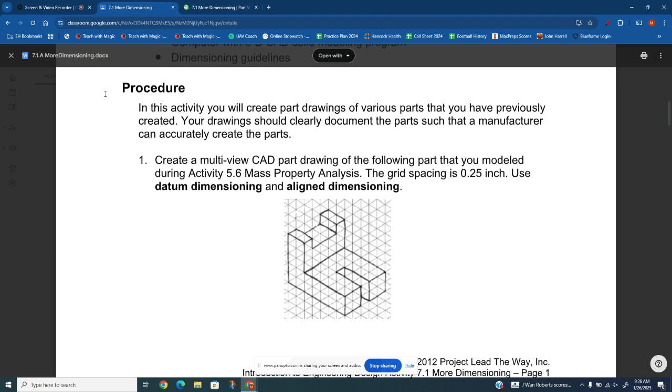Okay, hi guys, Mr. Galyan here, and I am going to show you guys today how to do assignment 7.1, more dimensioning on OnShape. So there are 5 parts to create on this assignment. What I'm doing in this video is just showing you how to make each part. I'm not getting into the drawing parts of it yet. Right now it's just the making of it. So let's jump right in.

We'll look at part 1. So part 1 here is this, I call it a chair. I don't know what you'd call this part, but that's kind of what I reference it as. And on part 1, each grid space is 1/4 of an inch. So what we're going to do to build this, the easiest way is to make kind of this left side of the chair, extrude it all the way through, and then cut out the notch at the top and cut out the notch at the bottom.

So if we look at this, this is 7 squares wide and 5 squares tall. So we'll jump right into OnShape here, and we're going to create a sketch. We're going to draw it like this. Make sure our lines are straight up and down, straight horizontal. We're going to make something like that.

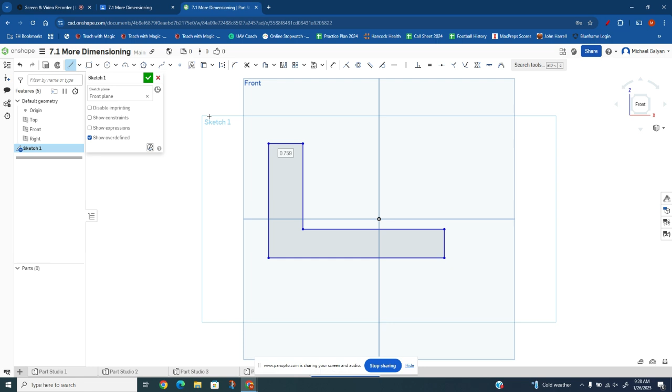Now we can use our dimension tool. We said it's 7 squares. Each square is 1/4 of an inch, so that is 1.75 inches wide. And it was 5 squares tall, so that's 1.25 inches tall. And it is 2 squares wide there, 2 squares tall there. So this should be 0.5. This should be 0.5. And we've got that kind of L shape. So now I can finish that.

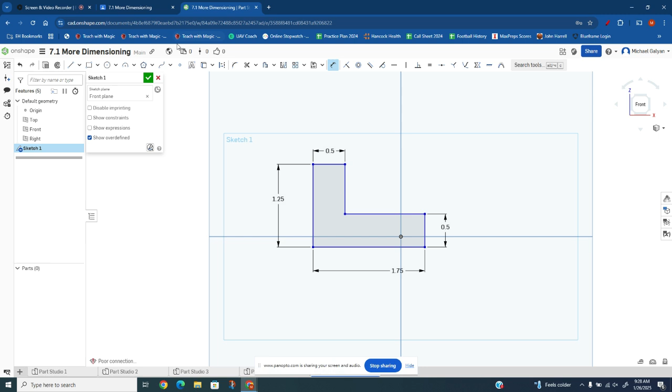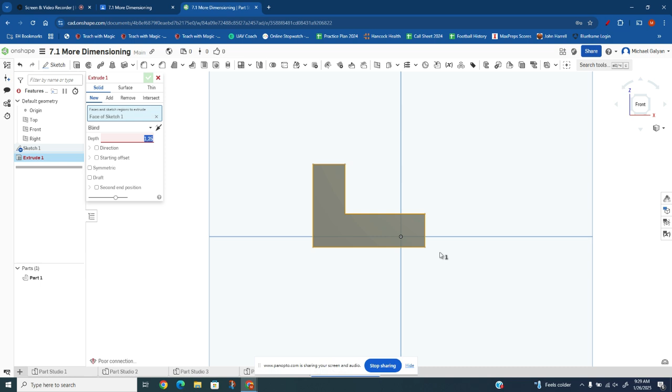Now we need to see how far to extrude it. Well, the width of this object is 5 squares. That's 1.25 inches wide. So now we can extrude this 1.25 inches. I typed something wrong. Yeah, I did. Okay, now we're good. I typed a comma instead of a period. So now we've got this seat part of the chair.

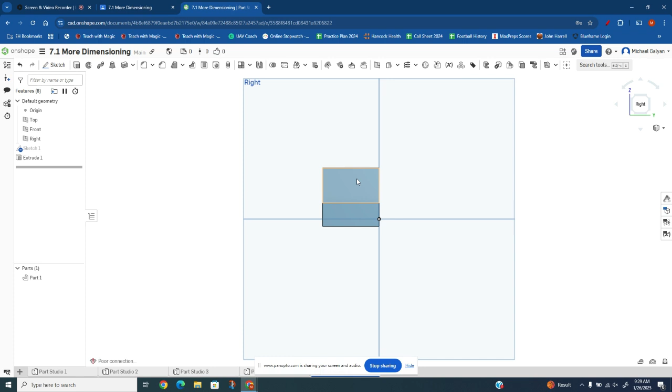Now we need to cut this notch out at the top. So if you see, this notch is 3 squares wide, 1 square deep, and goes all the way through there. So we're going to put a drawing right here. We'll zoom in on it. Put a drawing here. And again, we're going to dimension that. 3 squares wide would be 0.75 wide. 1 square deep would be 0.25.

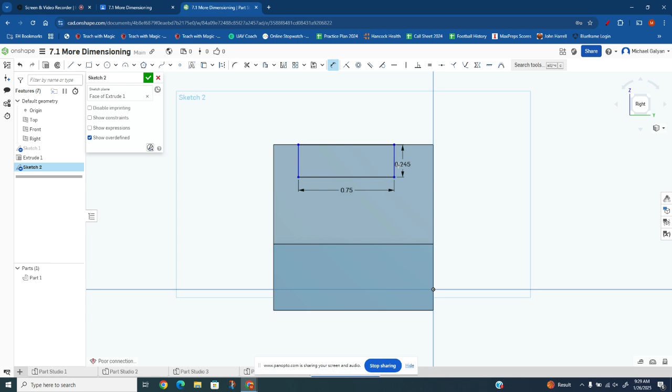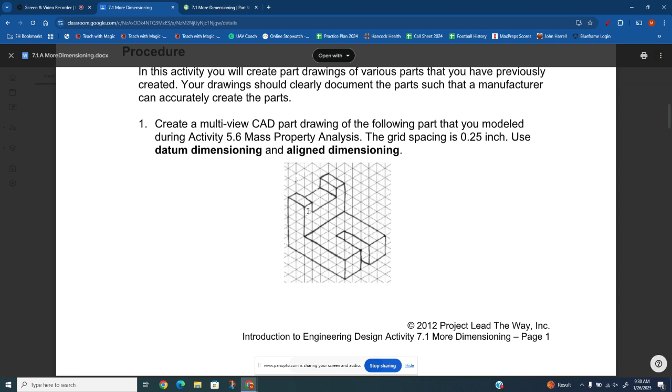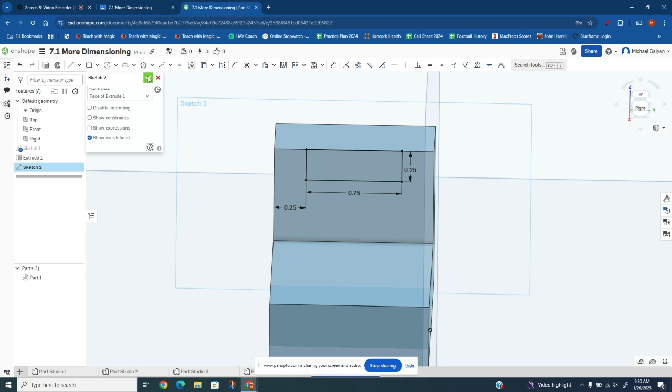Now, one of the key things, if you look at this, if I were to just cut this right now, you'd notice this little notch would be offset. So we also need to dimension the location of the notch. It is 1 square away from each side. So we need to dimension the location from here to here is 0.25 inches. And this one I don't need to dimension, but if I put a dimension there, you would see that it's also 0.25 inches. Now that thing is centered up. So I can hit my check mark, and I can extrude and change this to remove, and it will now cut out that top notch.

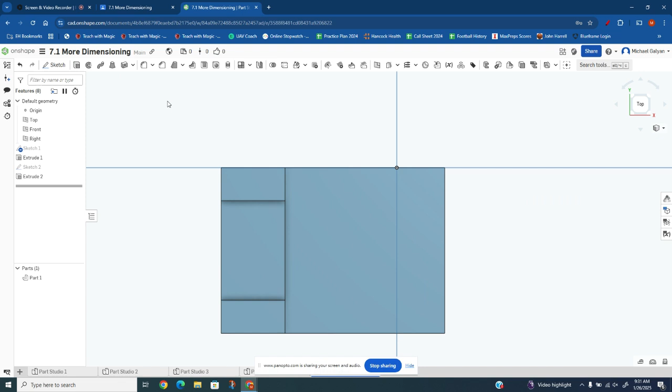All right, now I need the notch that would go down here. So now I look down here, and we see that that notch is also centered right smack in the middle of this thing. It is 1 wide, and it is 3 deep going back to the left. So I can do the same thing I did with the top, and I can sketch a rectangle here. Let me redo that. I think I messed something up. Let me redo, and I can sketch a rectangle here. And it was 1 wide, so 0.25 wide, and we said that was 3 deep, so 0.75 deep.

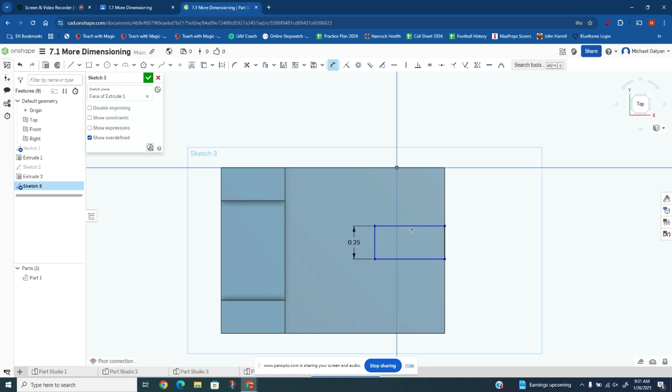And again, we want to center that within there.

Sorry, my cat is trying to play with me right now.

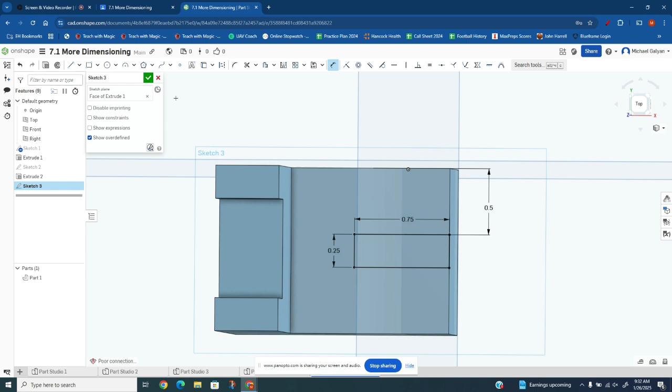So, we need to center that. So, we're going to go from this line to this line, and that should be 0.5. Now that piece is centered, and we can now extrude that and remove it just like we did the top one, and we are all done. So part 1 complete. All right, let's move on to part 2.

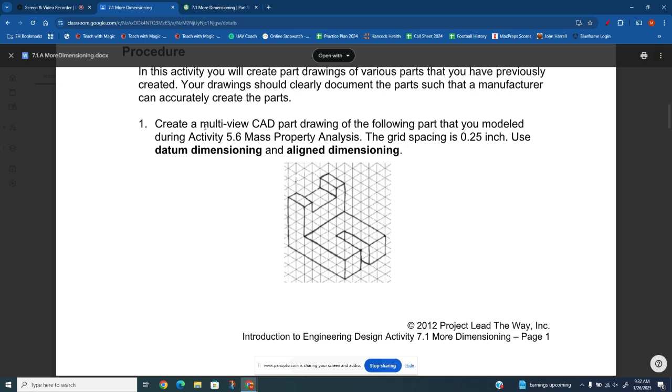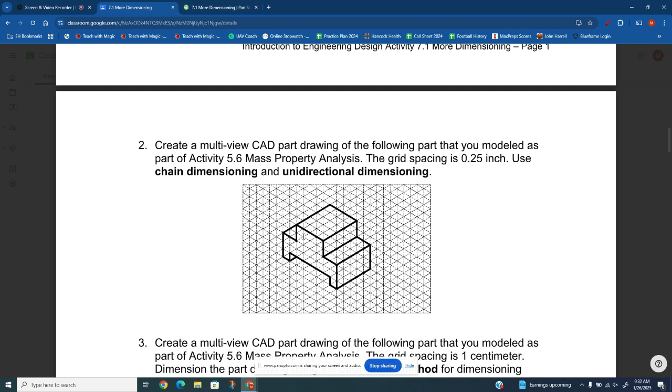Part 2 looks like this kind of, I don't even know what you'd call it, like a tabletop type thing. This one's fairly easy. We're just going to make this front view right here and just extrude it straight back. There's no other special stuff we need. So let's jump to Part Studio 2 to create this. We'll create it on the front.

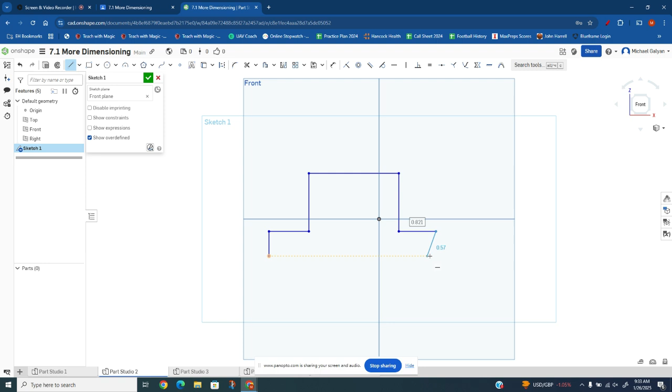And basically all we're going to do is draw this and then go through and dimension it and extrude it straight back. So we're going to draw it, and you'll see it just kind of goes up, over, down, kind of that way. So let's go ahead and try drawing this thing. So if I start here, it goes up, over, down, over, down. See, I squared up with that one. It makes life a little bit easier in the long run.

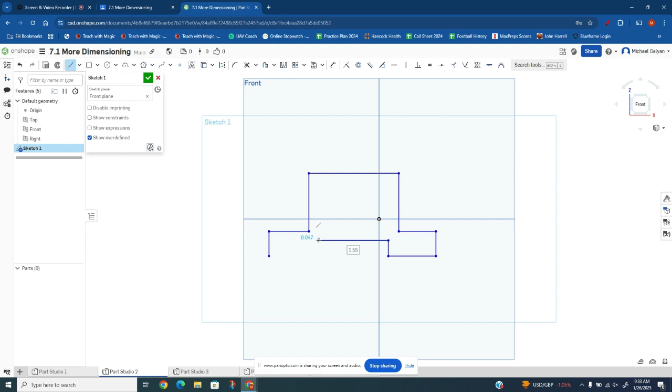And then I'm going to check and see what I need to do next. Down, I need to go over, up, over, down, over. So I can go over, up, over, down, over. Now it's just going to take some dimensioning here. So it looks nothing like what it's supposed to, but once I dimension everything in, it should be fine. So this first line should be 3 tall, so that's 0.75.

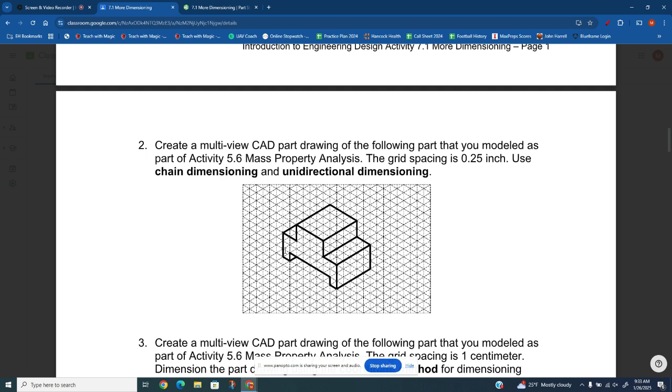So I'm going to, let's see if I can split this. There we go. That makes life a little bit easier here. I can now see that as I go to dimension this. So now I have my dimension tool by hitting the letter D. So I could make that 0.75 tall. And then it goes over 2, so this line right here will be 0.5. And then it goes up 2, so this line right here that I have highlighted will be 0.5.

And then it goes over 4, so this top tabletop part will be 1 inch. And then it's going to go back down 0.5, which it's already there. And then here, this next little part goes over 2. That's this part right here. It's not highlighting, but this part right here. So 2 is 0.5 inches.

And now you can see what's happened over here. So let's look at this. What's happened is, if you could tell, this has kind of gotten tangled up, which is a common thing. And if something gets tangled, what I like to do is kind of Control Z. And I'm going to come back over here. I'm going to delete that dimension. I'm going to come back over here and fix it from this side. So we're going to go here. I'm going to hit dimension, and I'm going to fix this line.

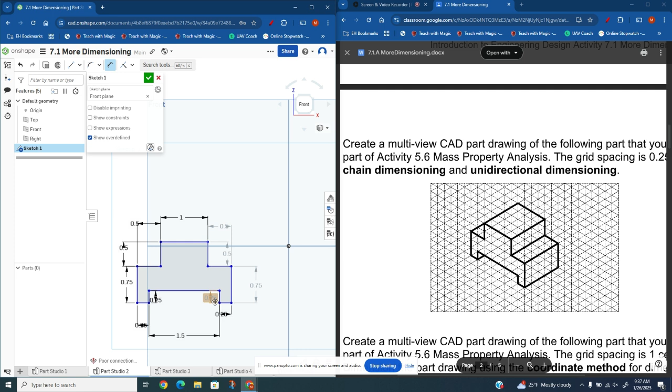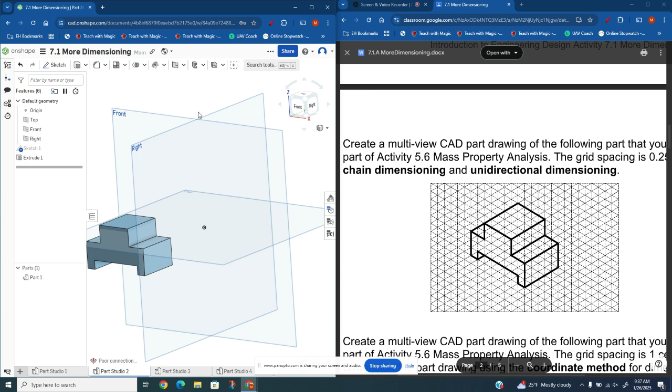And now we've got this shape that we can go ahead and extrude through. So now we've got our shape made. We just need to extrude it, and it goes 1, 2, 3, 4, 5 deep, which tells me that that is 1.25 inches deep. So I can extrude that out to there, and then I am done with that one.

All right. Now, this one here, number 3, is where people start to get really confused. But 3 is actually not that difficult. It's just using a tool called Loft that a lot of you guys haven't used before. So once I show you guys how to do Loft, you're going to go, oh, this is actually a pretty easy one. Even though this cut, if you notice, angles back, it's deeper in the front than it is in the back. So we're going to start by just making this rectangular box.

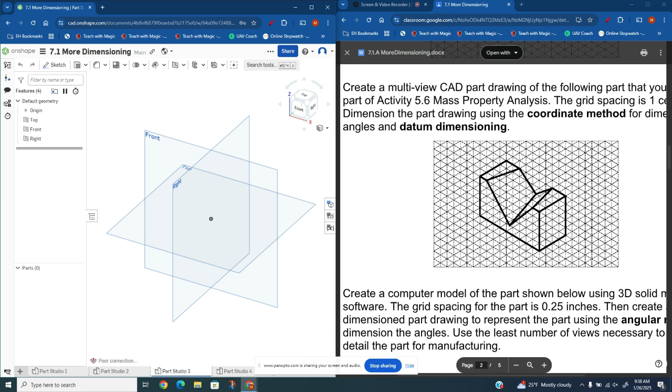So we're going to make a box, and we notice here the grid spacing is 1 centimeter. So we're going to make a box that is 1, 2, 3, 4, 5, 6, 7, 8, 9 centimeters wide, 1, 2, 3, 4, 5 tall, and 1, 2, 3, 4 deep. So let's just start with that. So 9 centimeters wide.

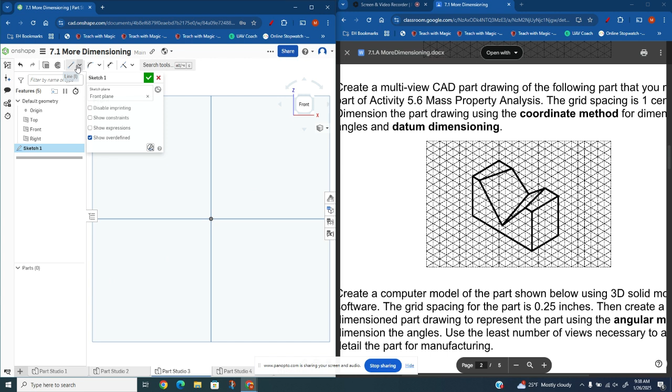Let's get back to here so we have all of our tools visible.

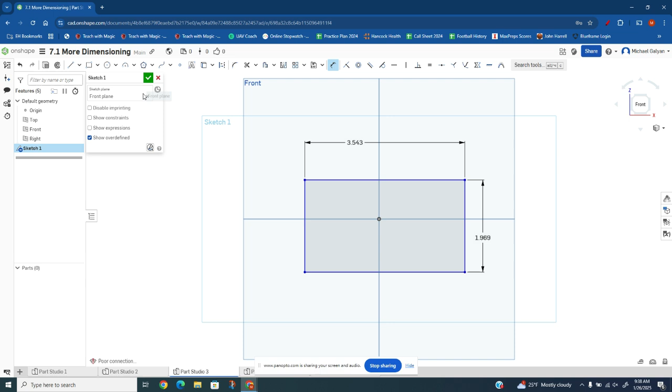9 centimeters wide. If I hit my dimension tool, I can type 9 centimeters, 5 centimeters tall. And then I'm going to extrude it 4 centimeters deep.

Boom, box is done. Now what I'm going to do is make sure this has all been working. Yeah, it's all been, making sure it was all recording okay. That's all I was just curious about.

We're going to draw a triangle. If you notice, this cut is triangular in shape. So what I'm going to do is draw a triangle on the front. If you think of the 3 points of the triangle, 1 point is here where my mouse is, 1 point down here, and 1 point up here. If we put a dot where each of those points are and connect the dots, we can make this triangle.

Excuse me while I sneeze here. Sorry, cold season here in January.

But if I put a dot where each of those are, you can really make this work. So these top 2 points, if you think about them, they are on that top edge of the box, and each of them is 1 centimeter from their respective corner. So if I look at this bottom one, this third point, it is 1 centimeter off the bottom, and you can tell it's also centered left to right. So it is 4.5 centimeters from the left, 4.5 centimeters from the right. Here's kind of how I look at this.

What I like to do is draw a triangle, and you can do it 2 ways. I know a lot of people will just put those 3 points in and then connect them. So they'll put a point here, make sure it's on that line, then put a point here, and then a point down here. I'm just going to put this point.

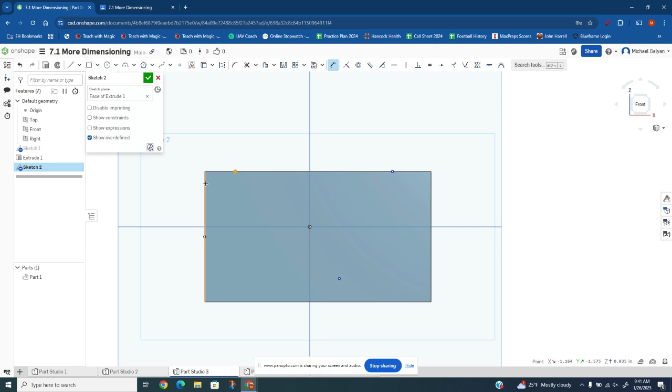I know this is off center, I know these points' locations are not correct, but I'm going to show you how you can make sure they're good. So this one, as long as you attached it to this top line, all you need to do is dimension from here to here 1 centimeter, and it puts that point in the exact right location. Same thing over here, 1 centimeter, puts that in the correct location.

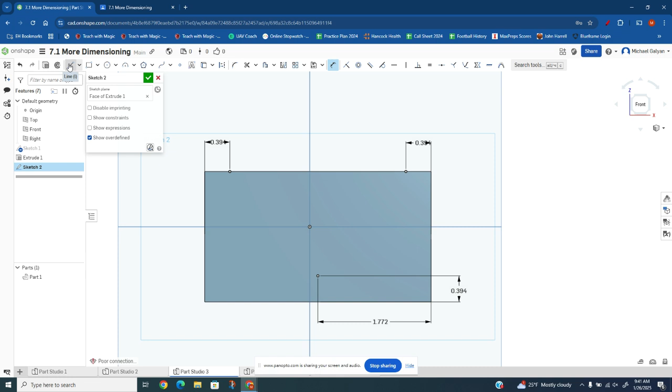Now this one, we need to know how far it is off the bottom and how far it is from the side. So we're going to dimension off the bottom 1 centimeter, and we're going to dimension from the side 4.5 centimeters. Now I've got those 3 points. All I have to do is switch to my line tool and connect the lines.

And I am done with sketch 2. So I've got a triangle on the front. Now what I'm going to do is flip around to the back and draw another triangle on the back that's a different size that'll allow us to cut to it.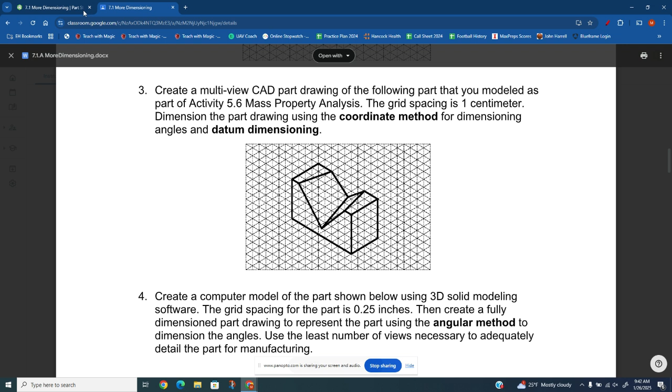So what we're going to do here on the back, and again we are looking at the back of this box, is we're going to put our points again. We're going to put a sketch on the back of the box. We're going to put a point here, a point here, and again just make sure that you highlight that top line and it sticks to those lines. And then we're going to put one right in there somewhere.

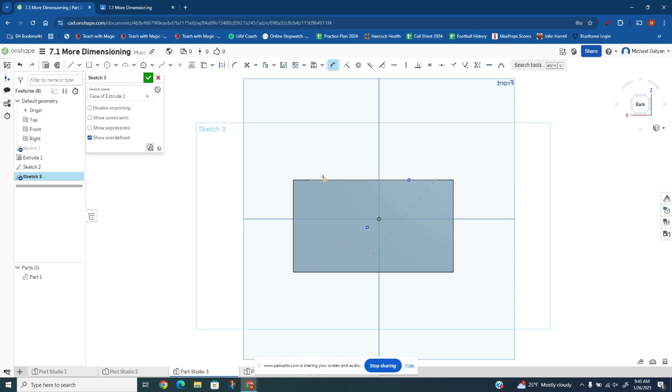Now we can hit our dimension tool again. This should be 2 centimeters from the edge, this should be 2 centimeters from that edge, this should be 2 centimeters from the top, and 4.5 centimeters from the edge. About 4.5 centimeters would probably make more sense than inches. There we go. Now we can connect the dots again.

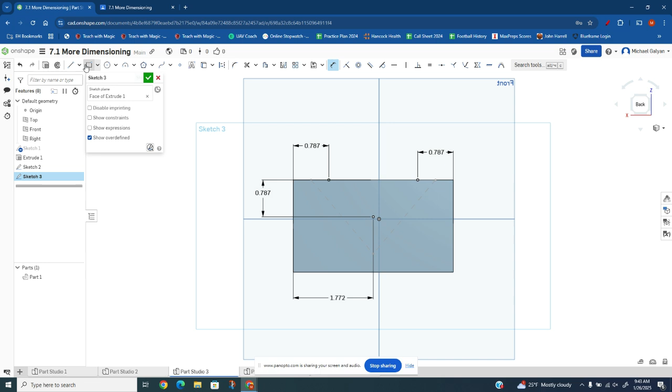And now you'll notice we have 2 triangles drawn, one on the front, one on the back. This is our last part, and then we'll be done with part 3. We can't use extrude for this. Extrude won't work. We're going to use loft.

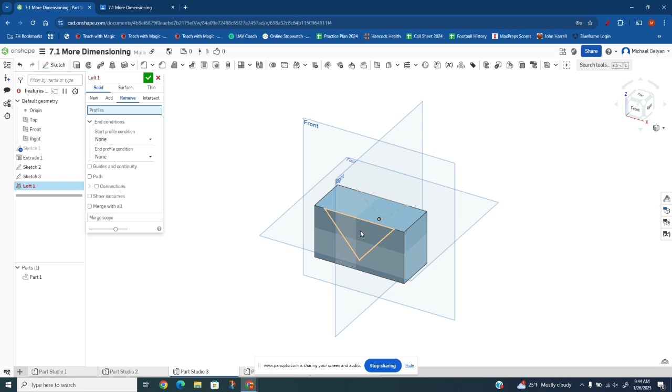There's a tool over here called loft, and loft will connect 2 parts on different planes, or cut 2 parts on different planes. So we're going to remove, and I'm going to click on this triangle on the front first, then flip around to the back, click on that triangle on the back, check mark, and you'll notice it cuts it at that cool angle.

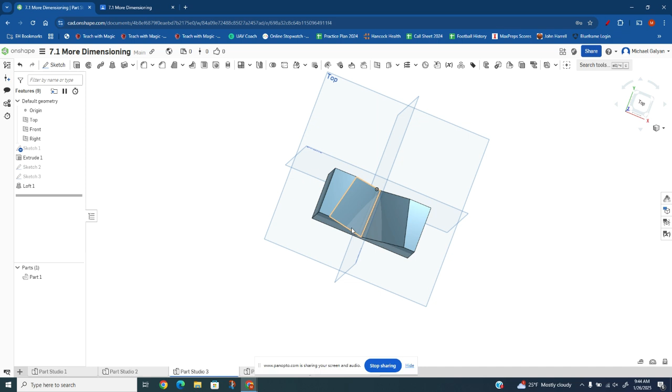All right, so now we are all done with part 3. With part 3, if you notice that something doesn't look symmetrical, if something's off, it's probably because you dimensioned something wrong with one of your triangles. You can go back into sketch 2 or sketch 3 and fix it, and the loft will adjust with it. So if you notice this is way smaller than this, or it's not going up as it goes back, you can go back and make those adjustments.

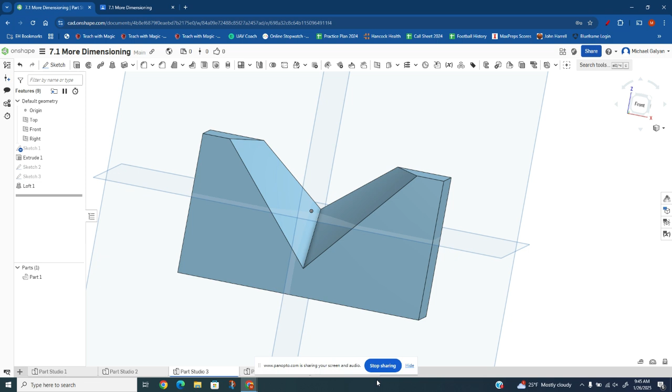So now if we go to part 4, right? Part 4 is this one here. The way I've done part 4 in the past is I typically make this as one big rectangle here, and then I cut this edge off, almost like a chamfer. Then I extrude out this part, it's not quite a triangle because it's got 4 sides, but I extrude this out afterwards. So let's start with this.

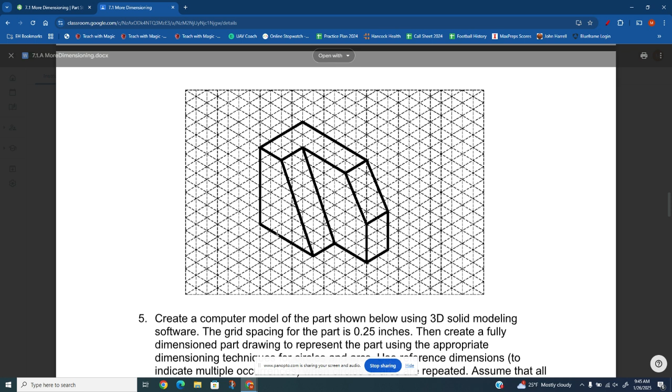This whole thing, if I were to make it, is 1, 2, 3, 4, 5, 6, 7, 8 wide, and this is in 0.25 inches again. This part right here is 2 deep and 1, 2, 3, 4, 5, 6 tall. So let's make something here. 8 wide would be 2 inches, 6 tall would be 1.5 inches, and we want to extrude it half an inch because it was 2 squares.

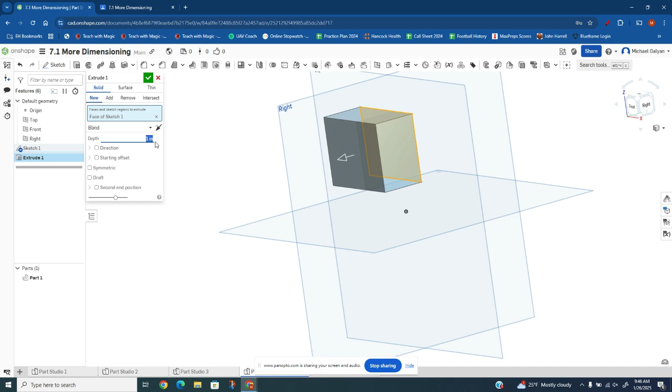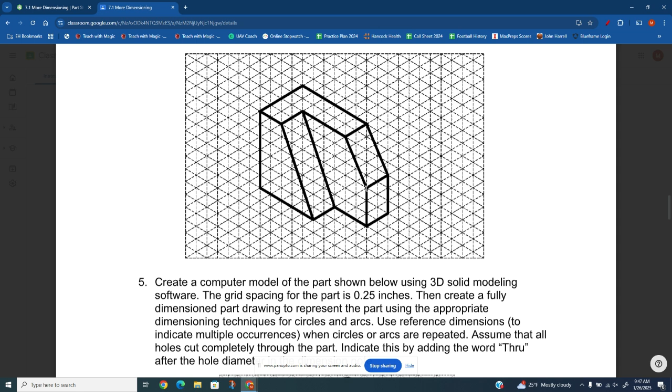So imagine this as being in 2 parts. This is the back part, kind of what my mouse is on right here, and this is that part. Now we need to cut off this little corner. How do we cut off that corner? The best way is to measure up. If we think of this angular line, we can come up 3, 1, 2, 3, and put a point right there, right where that spot is. So if we come back over here and make a sketch, we can put a point using our point tool right there, and another point up there.

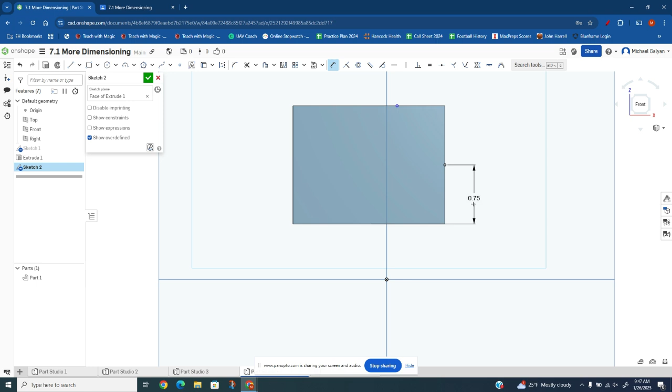Now we're going to figure out exactly how to dimension them. The bottom one we said was 3, so that is 0.75 inches off the bottom. The top one, if we look, is 1, 2, 3, 4, 5, 6 blocks from the far left, so that is 6 blocks, which is 1.5 inches. Now all we have to do is connect the dots.

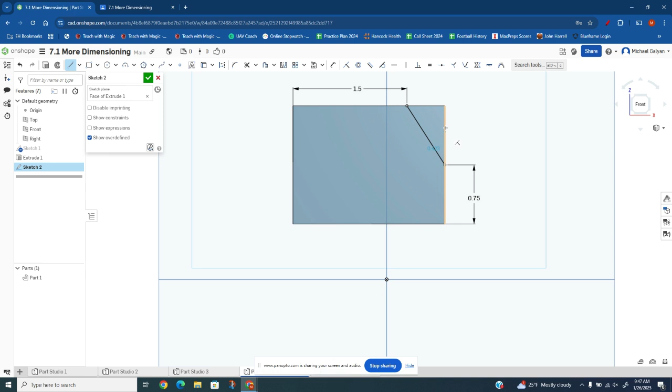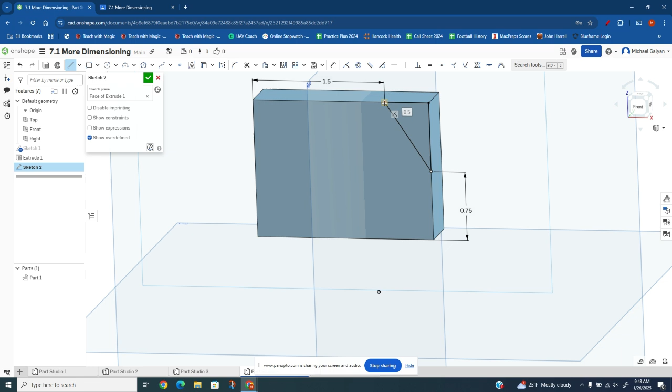Now, in order to extrude this, we will need to also go up to the corner and over. So in order to extrude and cut out this edge, we have to make that a full triangle. That's something a lot of students forget to do, they'll just make that line and then get confused as to why it won't extrude. You've got to go back up and make that full edge, because you've got to have a full shape in order to extrude something to remove it. So now we can click on remove, and we've gotten rid of that part.

So now, as you can see, we've got this part right here. We just need to draw this other part onto it. What I do here, again, I use my point tool. I put a point right here, a point right here, a point right here, and a point right here, connect them all, and then I can extrude that out towards me.

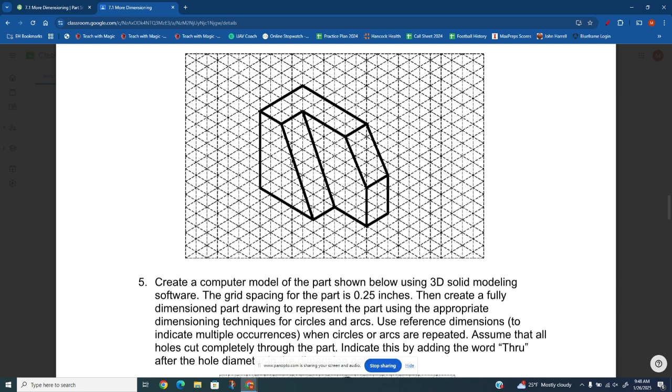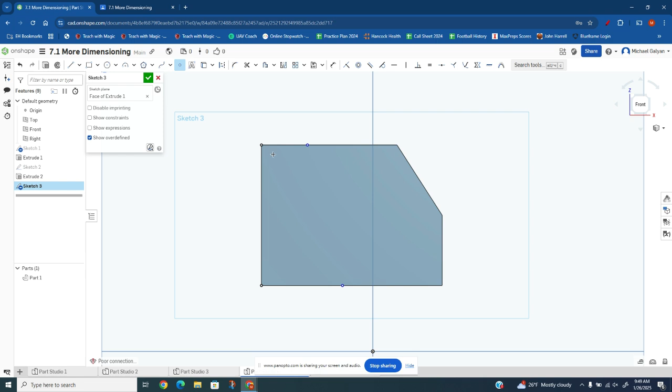So if we do that, we can make a new sketch, and I can put points here, here, and then in each corner. Now I just need to dimension them to the right spot. This top point is 2 off the left, so that's 0.5 inches. This bottom point is 1, 2, 3, 4, 5 off the left, so that is 1.25 inches. And then use our line tool to connect them all.

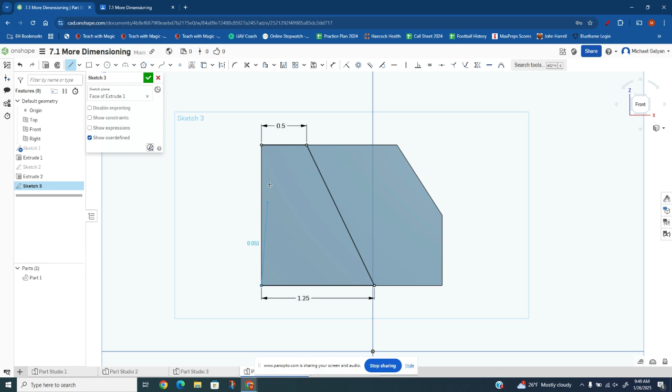And now we can finish that, and we can extrude that out towards us. It was two deep, so we need to extrude at 0.5. And now we have shape number 4. So I'm going to leave off right there.

Shape 5 is a little more confusing. I'm going to make a whole different video on shape 5, or we'll do it in class, one or the other. So I'm not going to add that in right now.

Actually, you know what? Let's go ahead and do shape 5. We might as well, just to add it to this video, just so that we've got it. I wasn't going to, because I was going to do that as a separate day's assignment, but we'll do shape 5 as well. So shape 5.

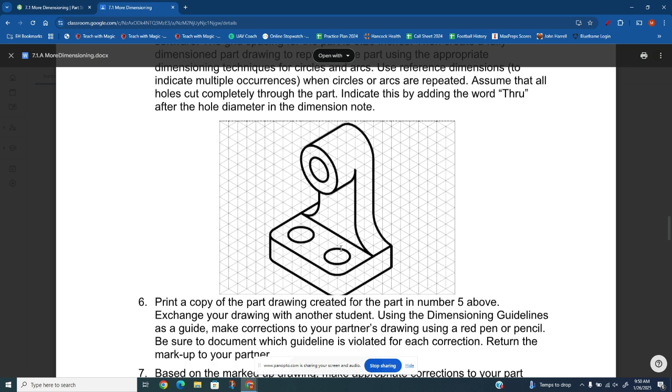This one confuses a lot of people because of all the edges that are rounded. And the biggest part that confuses people is you can't see exactly how tall this is very well because of the way that part of this is hidden.

But with the way shape 5 is, what we do: we make the base as a square, and then we fillet the edges. Then we make this vertical part as a square, and then we fillet the edges. And then we draw the circle and extrude it out towards us here.

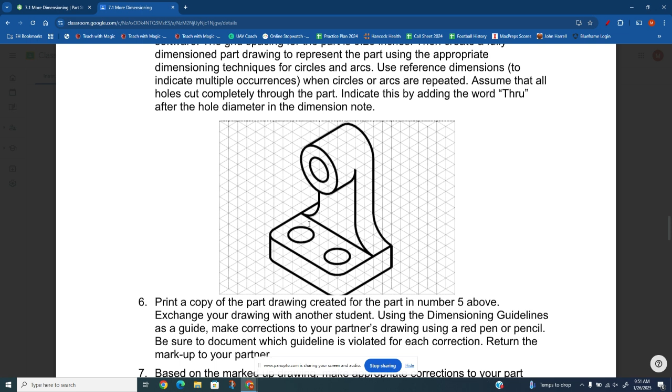So we're going to start with the base. The base, we think of it as a square. It is 1, 2, 3, 4, 5, 6, 7, 8 squares wide. Each square again is 0.25 inches. And it is 1, 2, 3, 4, 5, 6 squares towards us. So 8 by 6 and 2 high.

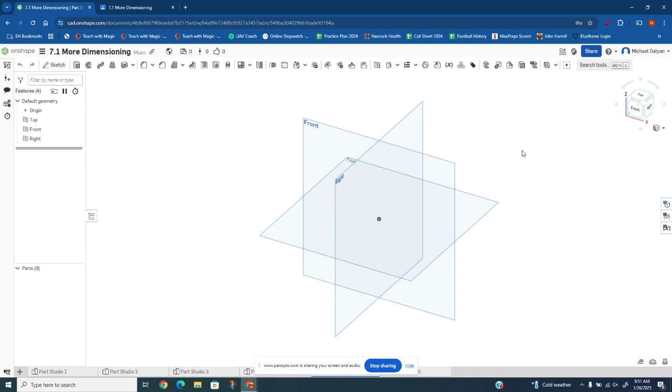So let's make a new part studio down here. We said 8 by 6. So 8 is 2 inches. 6 is 1.5 inches. And we will extrude that 1/2 inch deep.

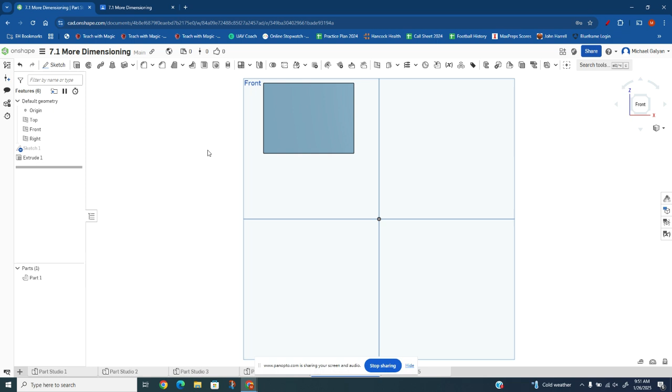So that is our base right there. All right, so we have our base. Now we need to fillet the edges here. The back edges, as you noticed, are square. The front ones are filleted. So let's go ahead and just fillet the front one.

So we'll just click on our fillet tool. Click on that edge, click on that edge. It doesn't tell you exactly what the fillets should be on this. We would assume that they are 0.125 inches because they're kind of half of what each part is. But...

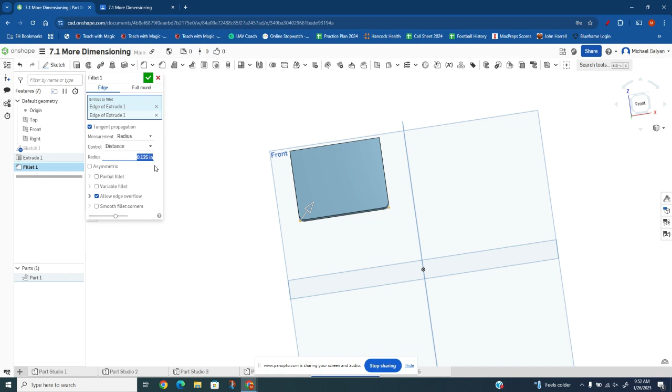If I do that, what you're going to see is they look really, really small when I do that. So I don't care so much if your fillets are perfect, because they don't give you any dimensioning here to know exactly how big to make them. So I'm not too worried. If you left it with what it was, I think it was like 0.376 radius. If you left it there as the default, then you're perfectly fine. I'm not going to care either way on that.

So now let's look at this vertical part that sticks up. First off, we need to figure out how tall it is. It is 1, 2, 3, 4, 5, 6, 7, 8, 9 tall. So 9 is going to be 2.25 inches tall. And the width of it, not counting these edges, the width through the middle of it is 1, 2, 3, 4. So it's 1 inch wide, and it is 2.25 inches tall.

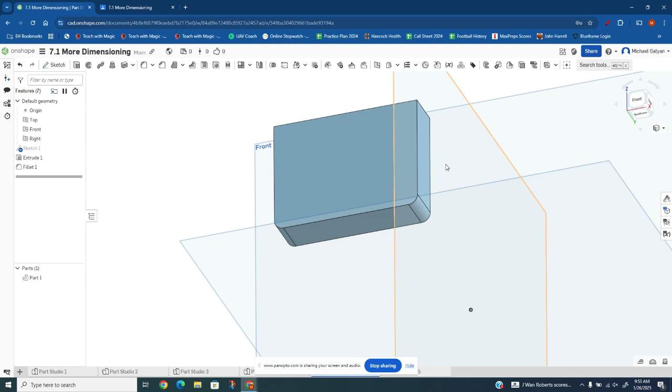So what I'm going to do now, I'm going to draw a rectangle. It doesn't look like a rectangle, but I'm going to draw a rectangle here that is 1 inch wide and 1/2 inch deep, because you can see the depth here is 2 blocks.

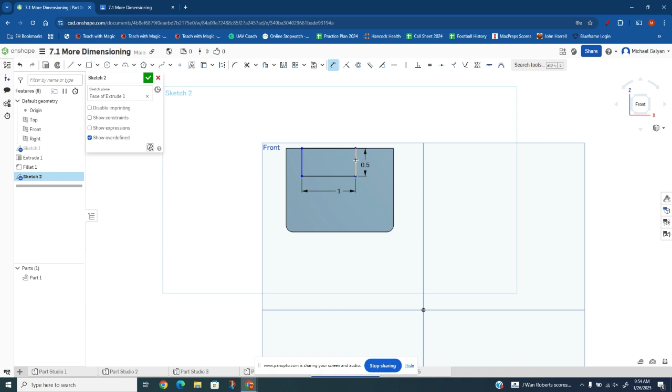And I need to center this. So to center it, we know this whole thing is 2 inches wide. If this is 1 inch wide, then it needs to be 1/2 inch from each side. So now it's centered. I can check mark it and then extrude it.

2.25, just like we said. All right, did it extrude? Make sure it got the right 2.25.

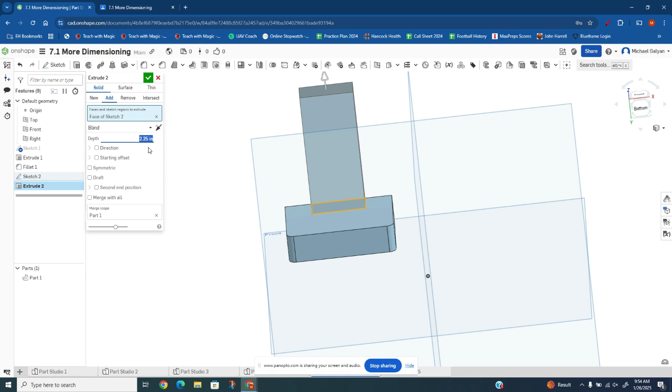There we go. I didn't think that looked right. Now I know this doesn't look like the object in the picture here yet, and that's because we haven't added the rounding parts. So the first part I'm going to do is down here. So down here, you can see how this slopes and connects right here. Ours obviously does not do that. So what we're going to do, we're going to add a fillet.

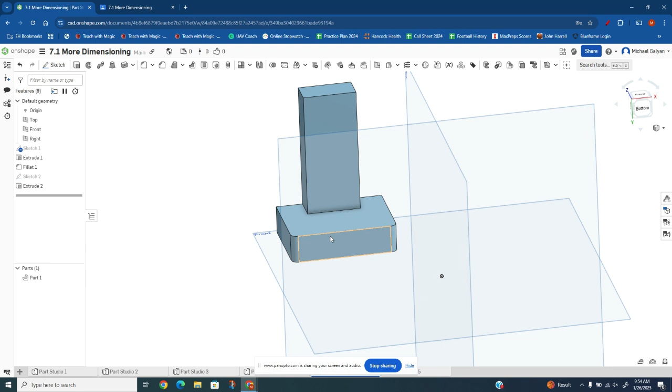Now again, there's no dimensions on here to tell us exactly what this should or should not be. So I'm just going to increase this fillet until it looks like the picture. So it ends up being about 5 roughly. I'm going to do the same thing on the other side.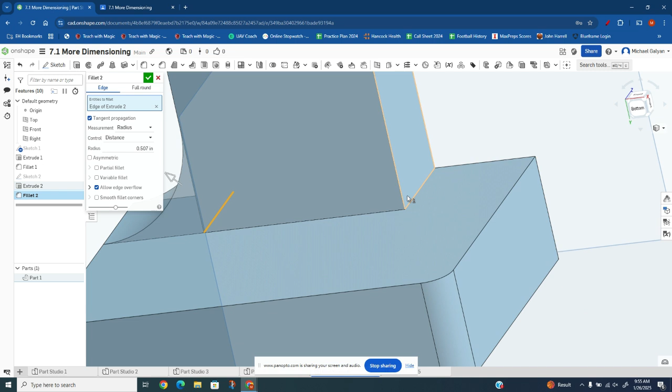Click on that one. And again, I'm eyeballing this because for the sake of this assignment, it's not going to matter. We're just trying to duplicate this part. So I eyeballed it. Now the base of this looks similar to what the picture does, right? Now the base part does. Now the top. So now here up at the top, we've got to figure out on the top how to make this round. And we also got to bring it out towards us.

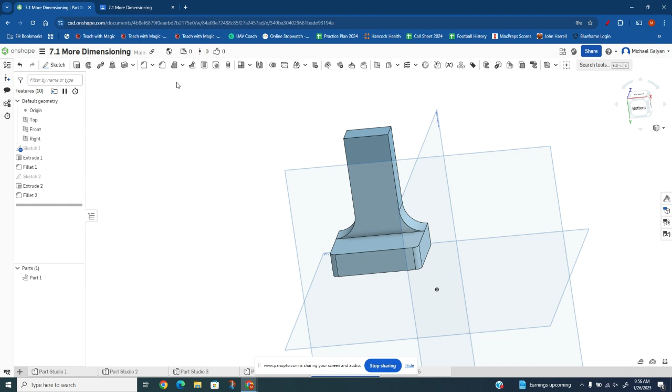What we're going to do is we're going to make a circle. So we're going to make a sketch with a circle, and we're going to extrude it out at us here. Now, before we do that, an easy way to fix this top part and round off the top part, fillet tool. Now this one, I think if I go 0.5 exactly, it looks really clean there. So now the top is starting to come along, starting to look like it's supposed to here, right?

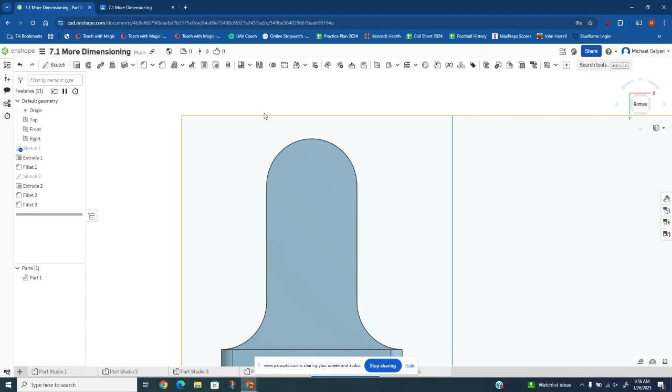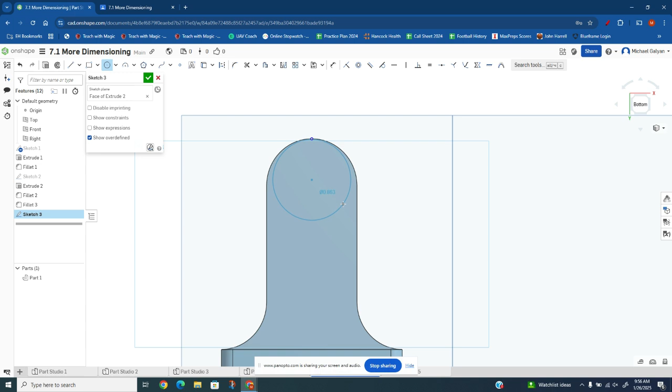But we need to bring this circle towards us, and it's even going to have a circle inside of it with a hole. So what I need to do, I need to sketch a circle on here, and I need to try to center it up. So see how I kind of found the center point of it, drop down to put my center point, and then make our circle here. And this doesn't look exact. I don't think I made it to the right spot.

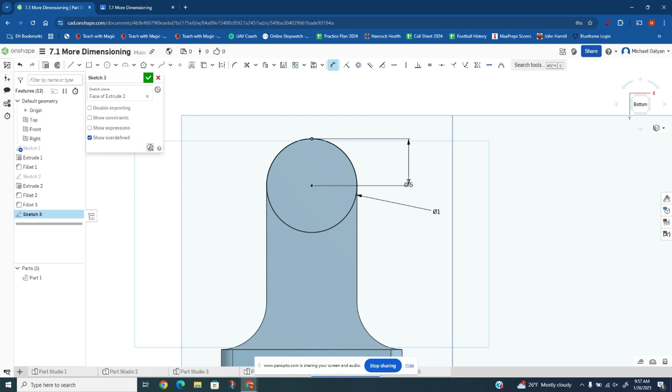But this circle, this outer circle that we're making right now, is 1, 2, 3, 4 tall and 4 wide. So that is 1 by 1. So we need to make that 1 inch. And we need to make it half an inch off the top. And now we see that circle lines up perfectly. So now we can extrude that out, and it needs to come out 2 more squares. So another half inch at us. So 0.5.

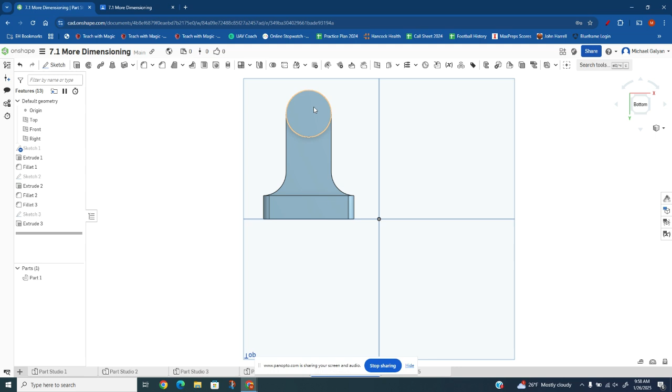Now this is starting to look like it's supposed to. So the last things, we just got to put the holes. So all 3 of these holes are the exact same size. They are half-inch holes. So this one here is just centered smack dab in the middle of that circle. So I'm just going to put a hole there. I'm going to put a circle. I can just use a center point circle.

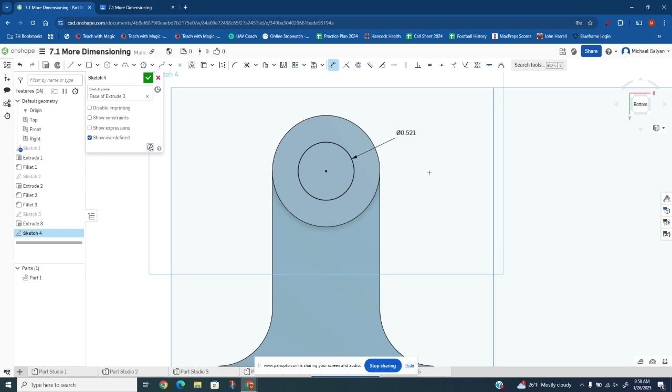And see how if I put my mouse over it, I can find the center of that circle. It'll automatically find it for me. So I can just do that. And then dimension that to half an inch, because those are half-inch circles. And then I can extrude that and remove it. And it should be all the way through. It is.

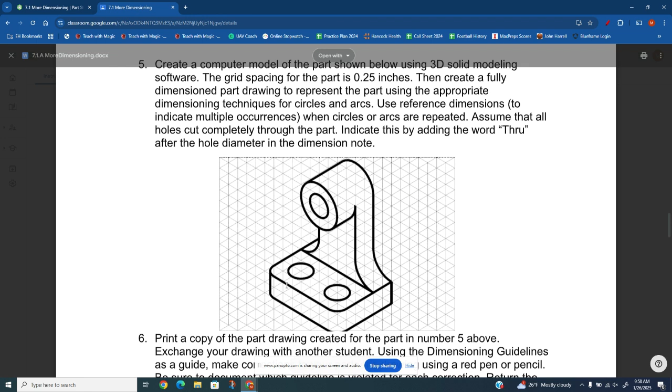Okay, and then on the base, there's those 2 holes. I'm going to do the exact same thing. I just got to find the location of the hole. And so the center of this hole is 1, 2 from that edge, 1, 2 from this edge. Same with that one. So all I'm doing here is drawing a couple of circles. They both need to be the size of 0.5.

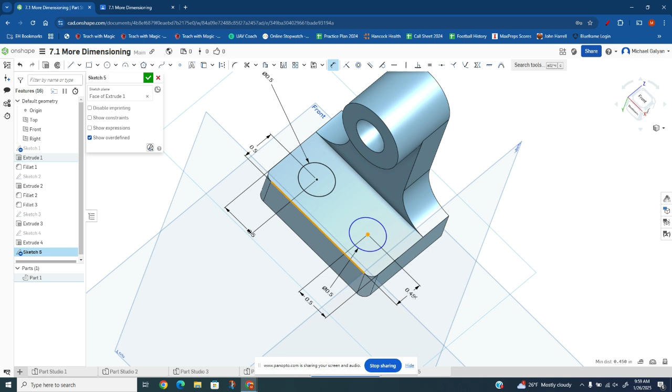And then location, they need to be half an inch from the edge, half an inch from this edge, half an inch from the edge, half an inch from this edge. And then I can just finish them, extrude them both through, remove them, boom. And there's that part right there. So that is now all the parts on 7.1.

Like I said, I originally only meant to do the first couple, but that is all your parts on 7.1 and how to do them correctly.